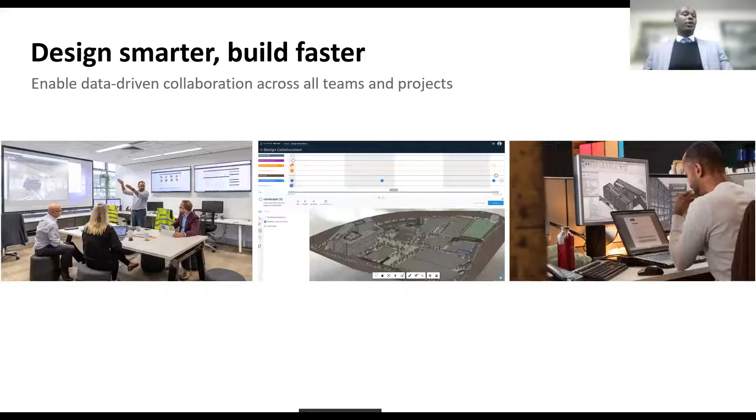That is then possible by using the power of the cloud, because by using the power of the cloud, teams can now work together in a connected way, maximizing all the efficiencies that we have.

We are reducing all these inefficiencies, and we start avoiding rework. At the same time, these tools, by working in the cloud, are flexible because we can work from anywhere. We can do the designs from anywhere. We can collaborate using these tools anywhere and anytime.

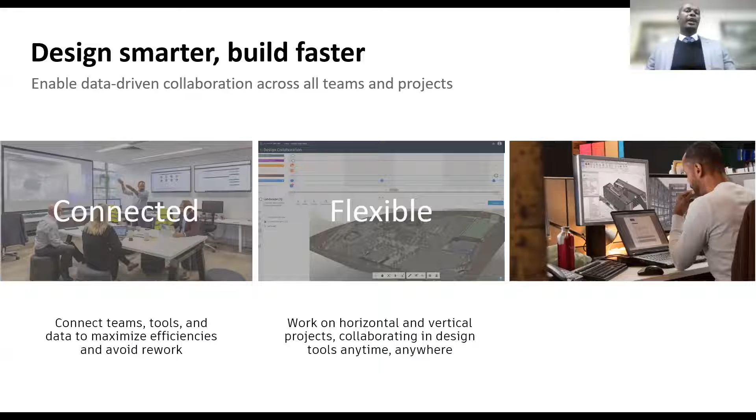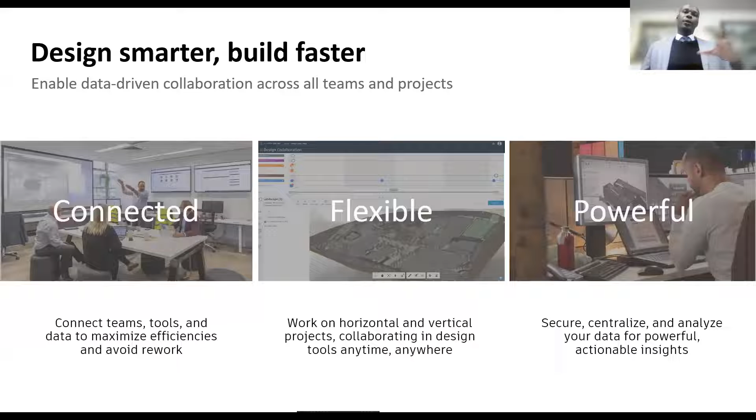Using the power of the cloud is very powerful, because you do not have to rely on your own computing power. All your project data is stored in a secure, centralized place, where you can also get insights from that data. And that is the solution to all the problems we face in the construction industry today, using the power of cloud collaboration. This is where it all comes together to fix the problems we face as an industry today. So what is BIM cloud collaboration?

The concept behind cloud collaboration is creating a platform that connects the whole project team. Think of teams working together in real time, even though they're in different locations, and being able to collaborate together even though you're using different software, working as different disciplines. You could be a mechanical engineer, a structural engineer, an architect.

All of these stakeholders are using different tools. But can you imagine if they could all work together and have visibility of what everyone on the team is doing in real time? This can then make it easy for all the designers on the project to make edits in this one central cloud model that is sitting in the cloud in this common data environment.

But also, the beauty about cloud collaboration is that even if you're not a designer, even if you don't use any design authoring tool, using the power of the cloud as an approver within a cloud platform, it will be great for reviewers. Why? Because you only have one place to review the project documentation.

So let's say you're a manager or a project manager, you have all the information about the project in one place. You can provide inputs to the whole team in real time because everyone is connected on this one platform. And then there's also decision makers on a project.

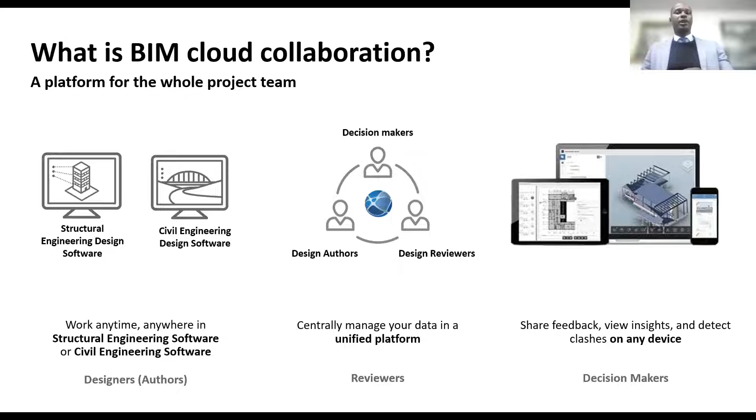So cloud collaboration, in addition to what I've just mentioned, allows teams to understand the latest changes in a model. And all of this is in a combined view because it combines all the models from all the different consultants. All those models come together. You have one place to view the information, no matter what software it's been created in.

And also, the power of cloud collaboration is that it has these project management tools that let everyone track whatever change, information, or work has been done by anyone on the entire team, because you have these beautiful swim lanes in this cloud environment that allow you to see what everyone is doing.

And also, this is one of my favorites: using the power of the cloud, you can automate the clash detection process. So if one person has made something in 3D and it's clashing with another model, you can see that it's clashing. Traditionally, we would look for those clashes manually, but using the power of the cloud, you can see that automatically. You can also start to track issues.

You assign issues to people in real time, and you can also manage change requests and publish documents, sending them between the team without the need for email to send a model to another team member. Now you can publish that model to the cloud, and everyone on the entire team is notified of the model that's been uploaded to the cloud.

Not all decision makers need to have an authoring tool, but they can also enjoy the power of using this cloud technology. Having a cloud platform is great for the entire team because it uses more than one design authoring tool. Most probably you're a design author and a structural engineer, and the amount of work you're doing requires you to coordinate with a civil engineer or an MEP engineer, because whatever they're designing is going to affect your design. You can use the power of the cloud to combine all of those models into one common data environment, overlay all those models, and actually see that work in real time.

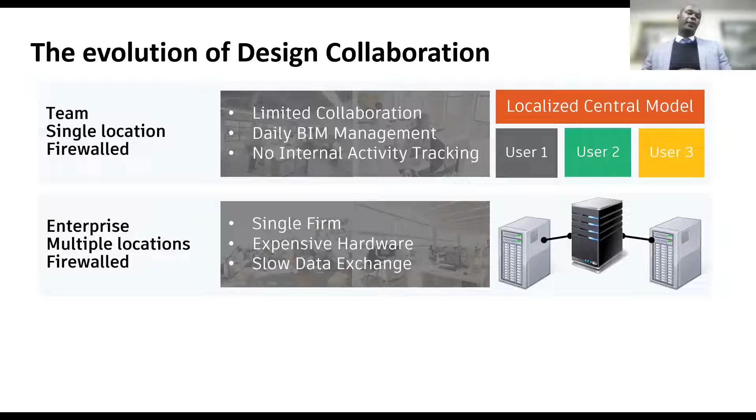Also, setting up that sort of technology was very expensive, as well as the problem that the data exchange using these methods of collaboration was very, very slow. However, with the power of the cloud, if we can collaborate in the cloud, all the project stakeholders can take part in this project, so you're not risking your data. Using the power of the cloud, multiple companies from multiple locations can also have managed access onto this, and also work faster and in real time.

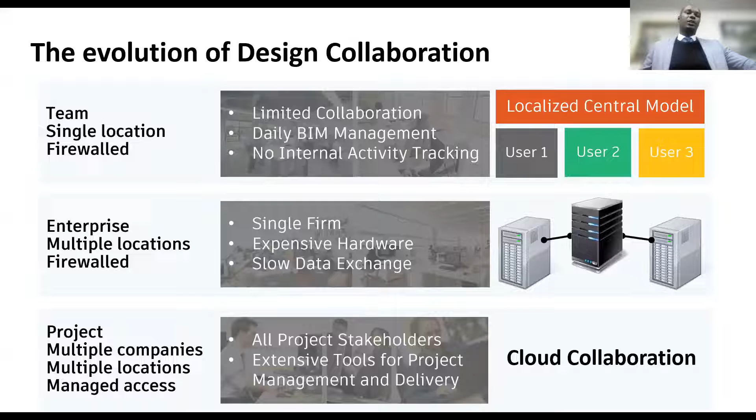It also provides these extensive tools for project management and project delivery. So what are the benefits of working from the cloud as opposed to working off your local server within the company? Working off a local server, you can exchange data and you can also work share, but that's it. If you are working within the cloud, that means you can now invite people from multiple companies to work together. You have a visualization tool, which you do not have if you're working on a local server.

The advantages of working on the cloud is that you can view all of this information on a device, whether it be your iPad or your phone or any tablet, and you can also take part in that design process.

And lastly, all the data is going on to one place. So whether it be a quantity surveyor, an architect, anyone who's working on the project is sending that data to one place. That saves us that problem we mentioned at the beginning, that 96% of all our data is lost. But if we're all saving the data in one place, it would be a great value to our projects.

What are the features that we face when we are collaborating on the cloud? First, a cloud collaboration platform should have a document management environment which accepts multiple files. It should be able to accept 50 plus file formats. Whether you're working in PDF, it's got a PDF viewer, whether you're working in Excel, it has an Excel viewer, or whether you're working in any STL file or any of those multiple files we have in the industry today, this common data environment is able to host these files.

If your concern as a structural engineer is efficient team coordination, you can use the power of the cloud to ensure your project team is always aware of the project's overall progress. With the cloud, you have visual project management tools to track what everyone is doing. You can facilitate model exchanges and understand the changes between designs in the context of aggregated models in one single space.

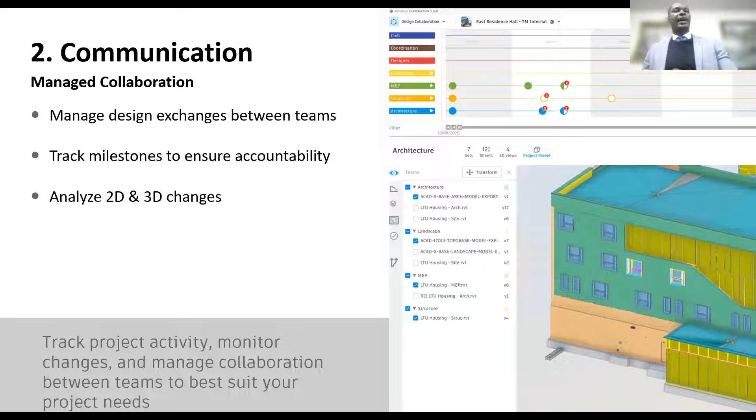With the power of the cloud, you have powerful visualization that lets you view your designs and the phase, differentiate which discipline it is, know which building level, and do cutouts and so much more in the cloud.

Let's talk about communication. If your concern is accountability, ensuring that everyone on the project is completing their tasks in a timely manner, with the cloud you can create issues and markups all within the cloud. These features let you pin issues in context, provide a comment thread visible to everyone, add photos, assign work, set milestones, and communicate issues in a way that's very visible to everyone.

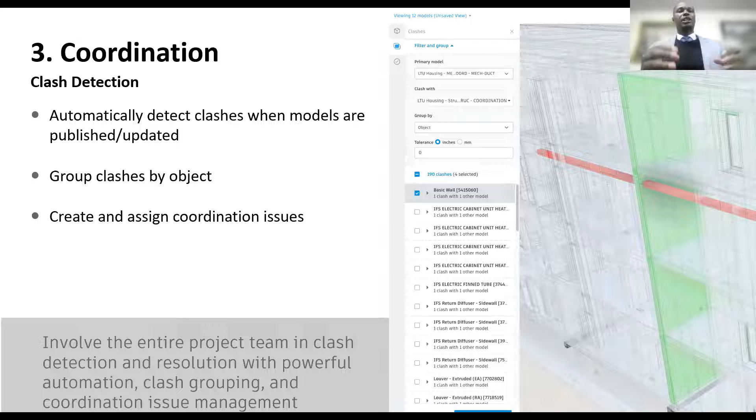With the entire project team involved in clash detection, you're able to resolve all the clash detection issues because, using this visualization tool, you can see whatever is clashing, assign these issues to be resolved, and then have them worked on.

But you might want to see how it works, right? So let's talk a bit about how it works. Instead of emailing a drawing, for example, to an architect, how would a structural engineer collaborate with an architect in the cloud? Please allow me to show you the next demonstration.

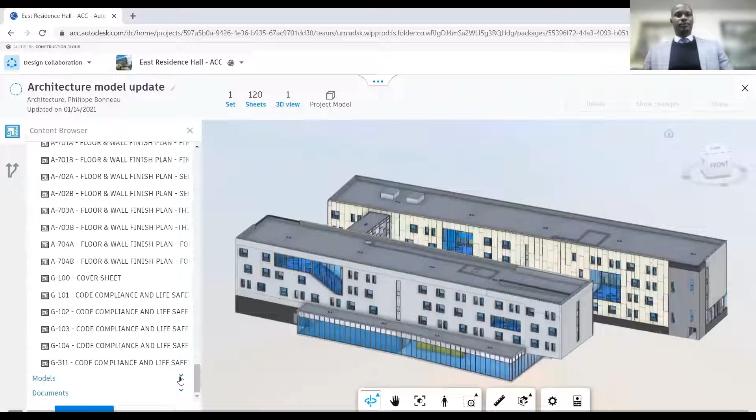Here, the architecture team creates a package and decides which content to include in this package. The package can then be explored and consumed by the other teams. Here, the structural team sees that a new package is available from the architecture team. After exploring the package and reviewing the changes that will impact their model, the structural team decides to consume the package.

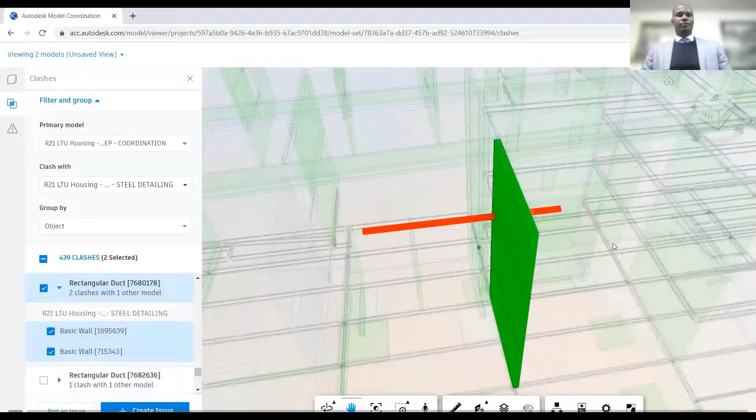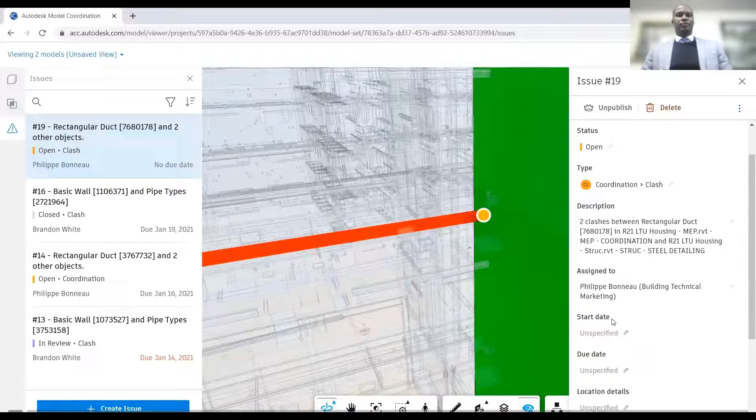Before a construction project breaks ground, it is important to identify and resolve clash and constructability issues. Model Coordination performs automated clash detection of models hosted on the cloud, enabling design and trade partners to quickly identify and resolve model conflicts. In addition, users can easily create, assign, and track coordination issues to ensure accountability and resolution.

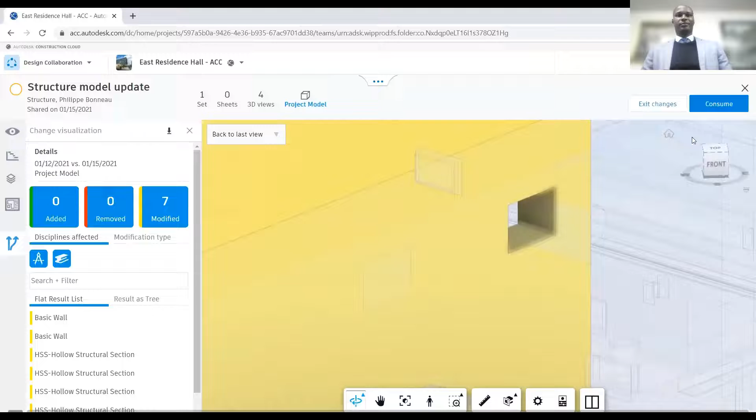Once the problem has been resolved in the Revit model, the team can create a structural package of their own and communicate their design changes back to the larger project team. The other team sees that a new package is now available on the project timeline. They can explore the package and use the Show Changes tool to better understand how the design has been changed.

Once the changes have been reviewed, they can change the status of the issue and close it out. Isn't that so beautiful, that we can start creating all these issues and resolve them within one environment, without having to use disconnected workflows. But how does a structural engineer collaborate with the rest of the team using the cloud?

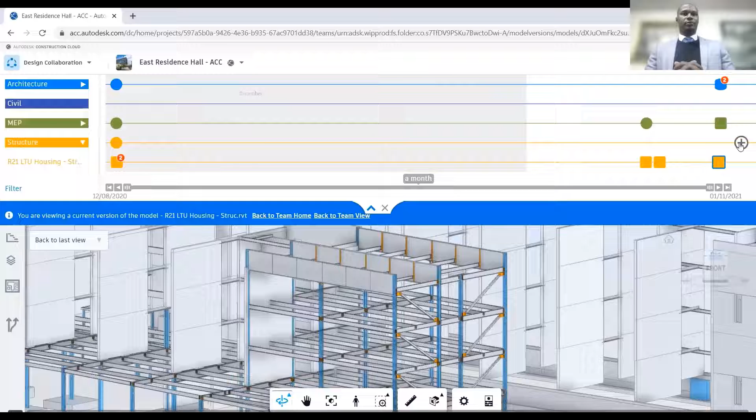Project teams communicate their design updates with each other using the Design Collaboration module in Autodesk BIM Collaborate Pro. Other teams get notified through the project timeline that a new package is now available. To make these changes available to other teams, the structural team creates a package, a combination of one or more sets to be shared. This package might include the Revit model, an IFC file, and other supporting documents.

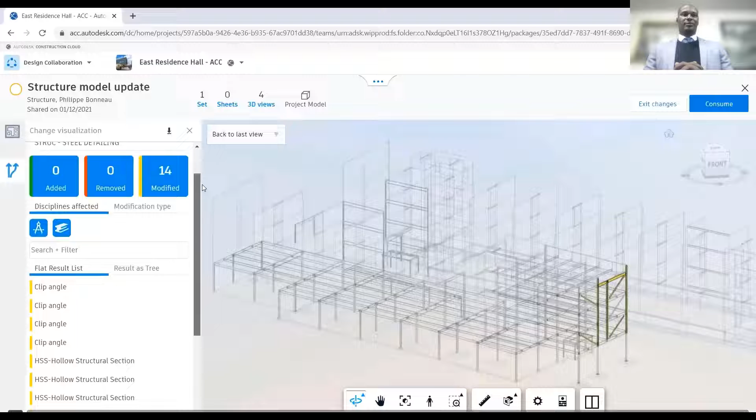Once the structural team has created and shared this package, other teams will be notified via the project timeline in the Design Collaboration module. Here, the MEP team sees that a new package is available from the structural team. After exploring the package and reviewing the changes that will impact their model, the MEP team decides to consume the package. This updates the aggregated project model view in the Design Collaboration module, where you will see all consumed models plus your own work-in-progress model overlaid on top of each other.

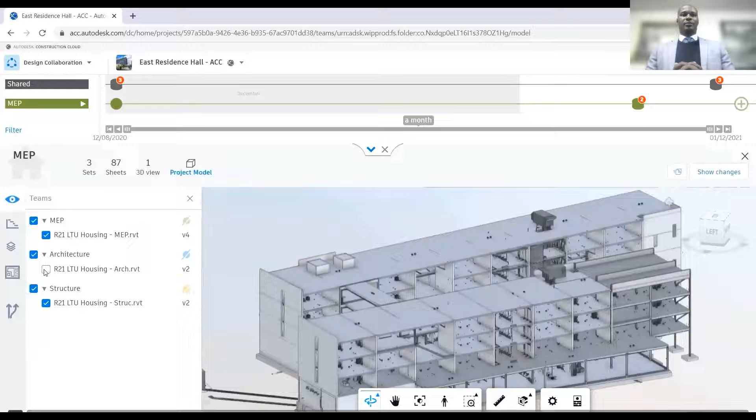The days of having project team members lie that they have not received an email with your model are over when you use this cloud technology. But as structural engineers, on ECSA Stage 3, we are required to coordinate these models. How can we do it using this technology?

In the Model Coordination module of Autodesk BIM Collaborate Pro, multidisciplinary teams can quickly identify and resolve clashes and design errors prior to construction. In Model Coordination, you can view models that have been uploaded to the cloud.

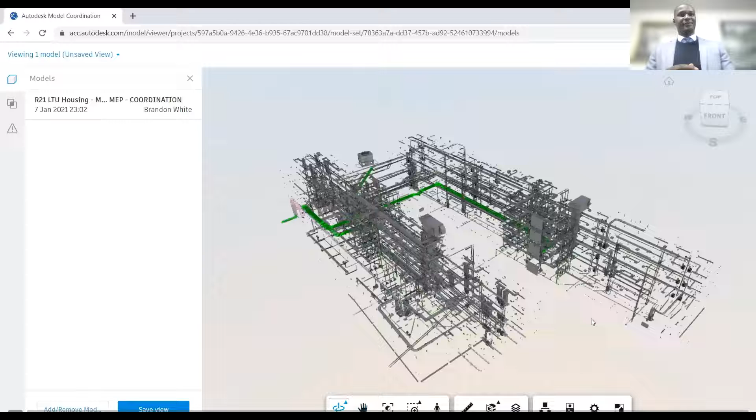From here, you can select models from your coordination space to use in Model Coordination. You can create saved views of a select group of models, which is helpful when working with subsets of a given project.

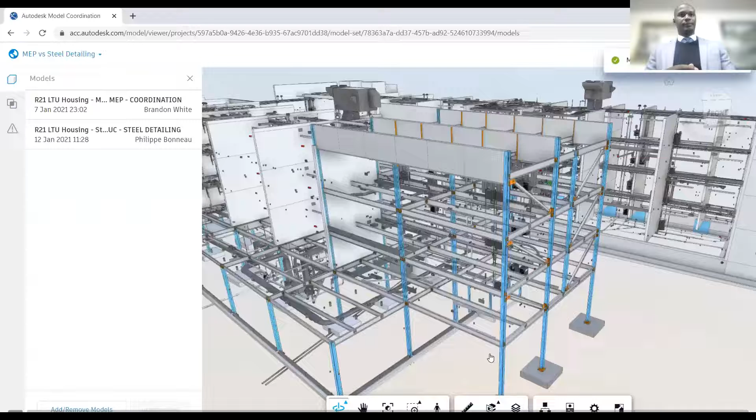Models uploaded to the folder are coordinated and instantly clash-checked. You can view the number of active clashes between any two models in this matrix. Clicking on a cell will navigate to the clash location, showing you what is interfering between structural and MEP. This means you can easily review clashes without waiting for coordination meetings and precisely locate those clashes within your models.

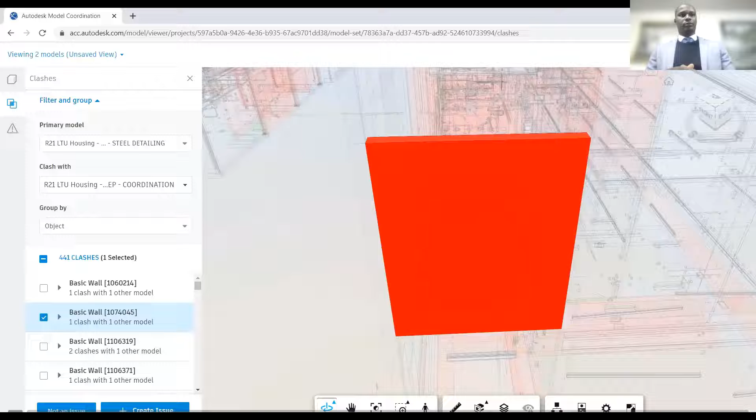You can mark a clash as not an issue if it does not require further attention. Model coordination allows you to create and edit issues directly from clashes between models. The issue title contains the ID number to help track the element in the Revit model.

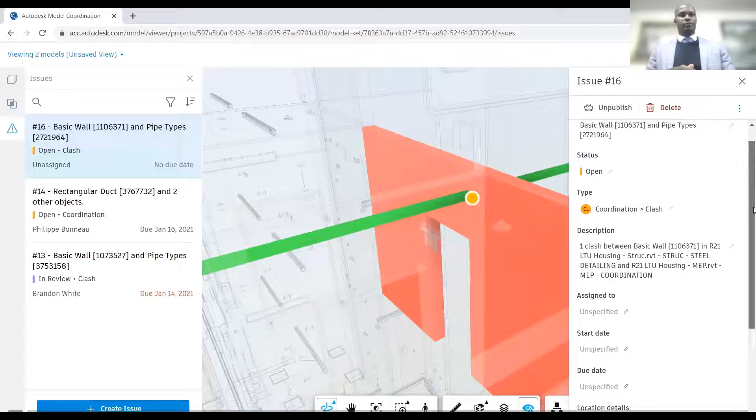You can edit issue details, add information such as location and due date, and then close the details panel. The issue owner will receive an email notification with a link to the issue.

If you go to Build Issues, you can see the list of issues which have been created for this project. You can view issue details here. A screenshot of the clash also appears here, automatically captured at the moment the issue was created. You can easily change the issue status from open to in review, or even to closed once the problem has been resolved.

Let us now finish off by talking about where this technology is being used. You'd be happy to know that this technology of working on a construction project and collaborating using the cloud is being used in 150 countries.

This technology is being used on 70,000 active projects right now, and there are over 150,000 models in the cloud, and there is over 10 million syncs. So this is how much people are working in the cloud.

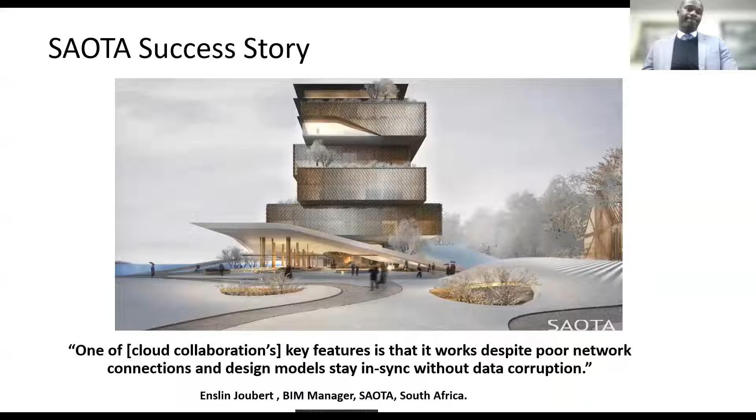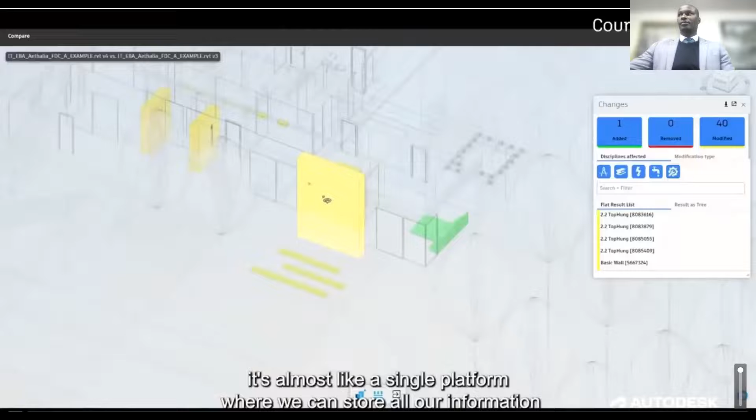Well, now that we've started working from home, we've adopted the BIM 360 method, which has essentially eliminated all the issues that we had when trying to connect to the server over long distances and trying to communicate across the team. The BIM 360 platform has also allowed us to, it's almost like a single platform where we can store all our information, and we don't necessarily have to worry or consider the back and forth between the connections and the different server files and folders.

One of the key tools of Revit we use is design options, where we switch between different options and see what will work given the specific scenario. And because of the fact that we are a design-driven practice, the modeling process is an important way to assess that.

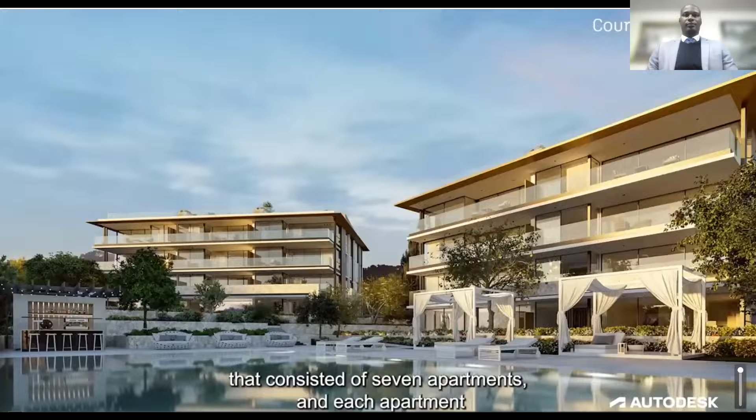We had an estate, a multi-residential estate in Mallorca that consisted of 7 apartments, and each apartment had 6 units and 2 penthouses, and 2 of those units were duplicated. With Revit, it allowed us to use the tools linking and grouping, so we could make one change duplicated across the units that were used more than once. Where a project like this, say on AutoCAD, would take months, we ended up taking weeks.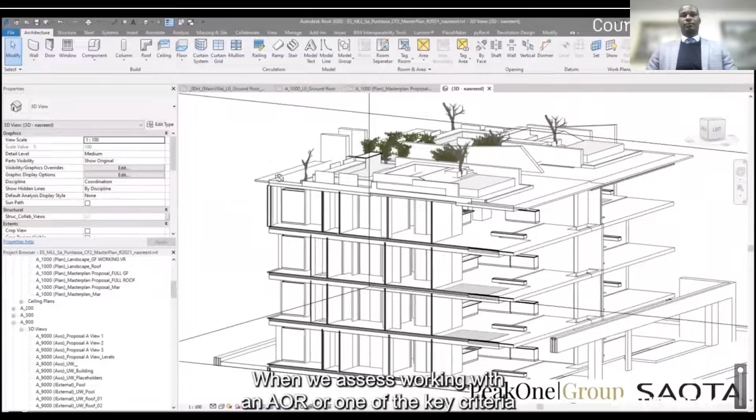When we assess working with an AOR, one of the key criteria is whether they work on Revit or the BIM 360 platform. In doing so, we're able to live work with one another on cloud-based models. There's less room for misinterpretation, and our design concept is maintained throughout the project, and throughout the project timeline.

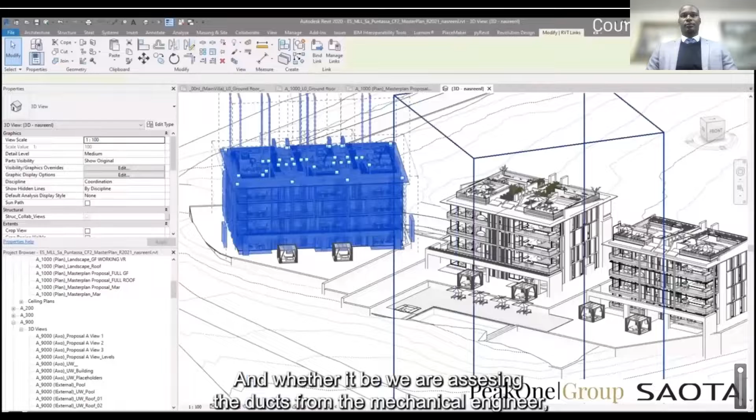Whether we are assessing the ducts from the mechanical engineer, conduits from the electrical engineer, and whether they work with the ceiling depths we propose, we are able to eliminate any room for misinterpretation, without having to drag different drawings from across different folders, across different servers, and at the risk of using superseded drawings.

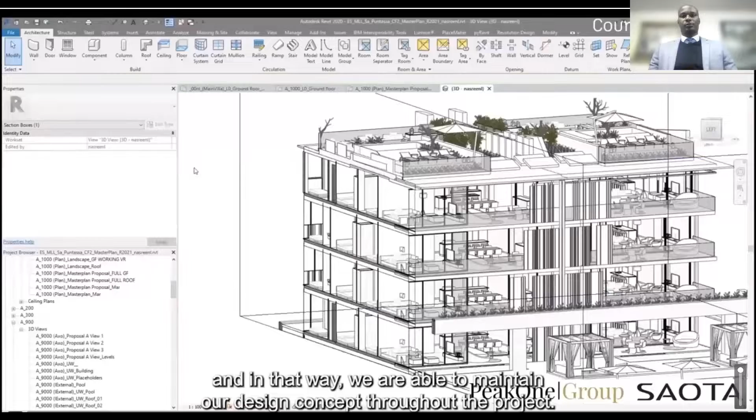So we are always doing clash detections and looking for areas, and when we do make a change, our consultants are able to assess them in real time as well. In that way, we are able to maintain our design concept throughout the project.

It is imperative to us that our documents are as engaging as possible to our clients, and with the 3D illustrations that we deduce from Revit, we are able to... Well, now. All right, and lastly, this is another example.

This is an international example of the Red Sea development. If you know anything about the Red Sea development, you'd know that it's the 3rd largest giga project, and it's currently being delivered as part of Saudi Arabia's Vision 2030. To deliver this vision, the client invested in best-in-class technology and used the power of cloud technology to be able to make decisions. They've actually said that the cloud technology offered them speed, and a saving of 1,200 man-hours, because a lot of the processes that used to be done manually have been automated. So that is what we get using the power of cloud technology.

At this moment, I would like to finish off this talk by doing a live demo, just to show you what can be achieved, and take you through different scenarios of how a structural engineer would like to collaborate with other stakeholders on a project. You'd notice that there are several cloud platforms available on the market, from multiple vendors, and these developers are making this cloud technology happen to everyone, because the future is in the cloud. I happen to be very well acquainted with the Autodesk Cloud Platform, so I'm going to stop sharing my screen and open up a cloud platform, and show how the collaboration could work in such an environment.

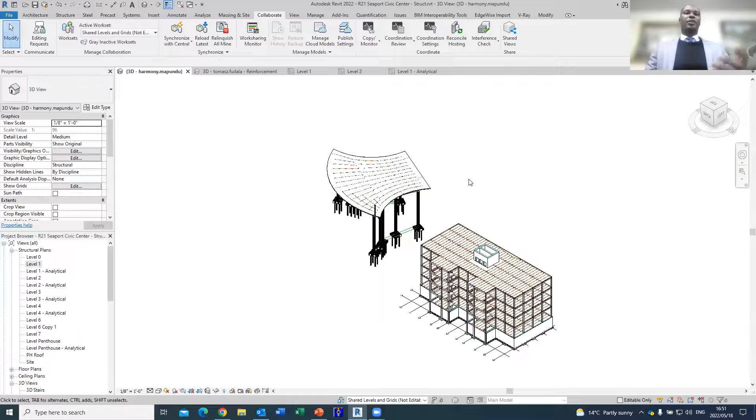For example, using Revit Structure, a structural engineer would have completed their designs, and there's an option to share this design in the cloud. They would go to the collaborate tool and click share in the cloud, and their model is then hosted in this cloud environment.

A structural engineer would go on, let's pick this level, on the collaborate tool and synchronize with Central. By doing that, you automatically send your model to the cloud. In this case, this model has already been shared with the cloud.

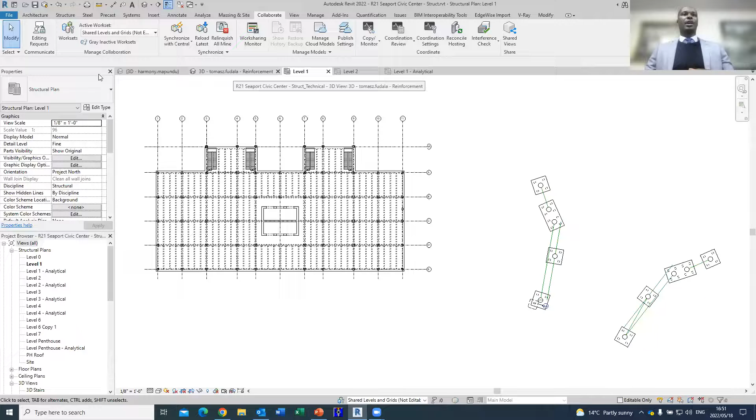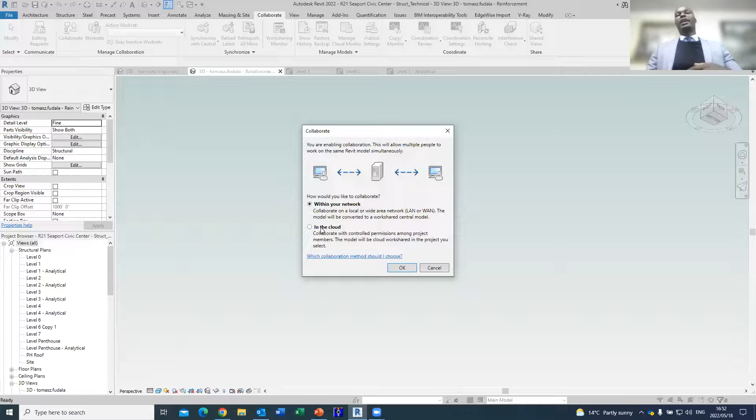But if you're working on a model that has not been shared to the cloud, the structural engineer would click on collaborate, and the model automatically is shared into the cloud. Whichever software you use, there's a cloud sharing functionality where you can share the model into the cloud, and it's processed and saved as a cloud model.

I'm not going to spend much time on this, but you already see the advantages — it lists all the projects that you have, and you can easily synchronize your model into the cloud.

The beauty of some of this is that there are now add-ins where issues raised in the cloud automatically come to your design software. There's also an issues tab, so if someone raises an issue from their phone and assigns it to me, that issue comes straight into my design software and I'm able to respond to it.

So as a structural engineer, once we've finished our designs or are in design in progress, we send our model to the cloud, and that model comes into the common data environment that I've mentioned.

You will pick a folder where you have permissions to share that model. Depending on the permissions set on the project, your model goes and sits in this particular place. It also tells you the day the model was sent into that space, and shows you a version of that model.

You can then view that model in this 3D space, and decide to share it with the rest of the team if they want to approve it. Once the model has been shared on this common data environment, you can view that model in this design collaboration view.

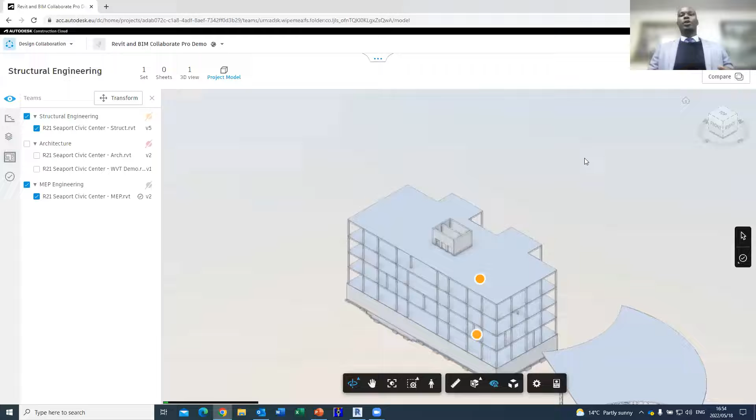For example, you'd like to work on that model in the 3D environment. As a structural engineer, you click on project model and you're able to view your project model, and see how it's interacting with the rest of the other disciplines.

In this case, our project model as structural engineers is interacting with the MEP model, and you're able to switch off the MEP model to see how your model interacts with the rest of the other models.

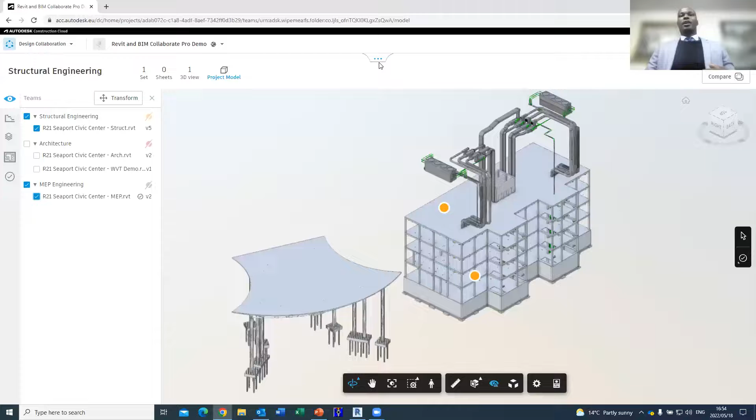We talked about having these project management tools formed by swim lanes. I'm sure a lot of people might have asked, what is a swim lane? With the cloud collaboration platform, it provides all the project team members with visibility on what has been done by the other project team members.

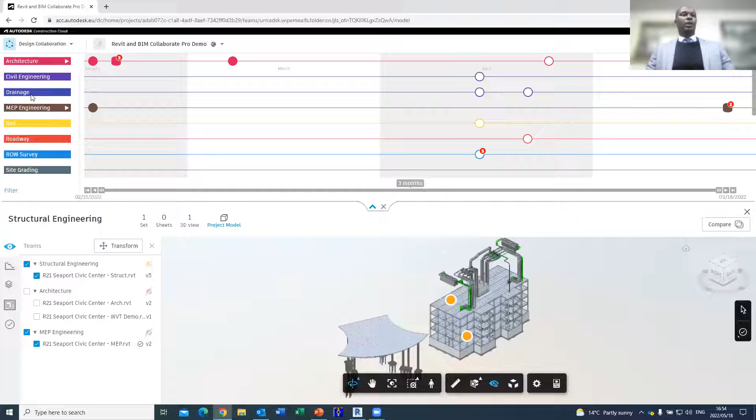You can see that the architect consumed a model on this day, and that they shared this model on that day. You can see everything they are doing in this environment. So let's say, for example, the MEP team shared a model on this day.

You're able to click on their model as a structural engineer, and you're able to click on the model that the MEP team shared, then view that model and compare the changes that have happened from the last time the MEP shared a model, which was 15 Feb 2022, and this new shared model, because the power of cloud technology automatically calculates using cloud computing the number of changes happening between the old model.

In the old days, when you get a drawing from another project team member, you'd rely on these revision clouds. You'd ask for a project team member to show you what they've changed and how that's going to affect your design. But with the power of cloud computing, you're able to view these models in that environment.

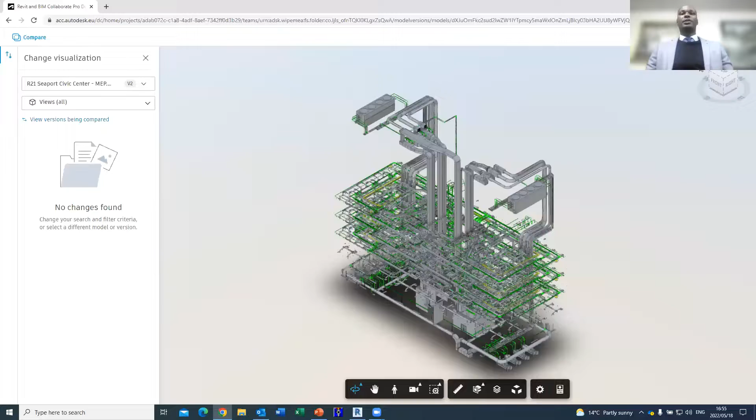As well as, let's say for example, I'm going to click back to home. Let's say you have received a model from an architect. You're able to click on that model, bring it into the space, explore that model, and create and assign issues about that model as well.

One of the things I like about cloud technology is creating a watch group. I'm sure every structural engineer is aware of the number of times people can revise a design during a project, because when a person makes a design, two weeks later they've revised it again, and now I have to revise the spacing of my columns.

We can create what's called a watch group. When we create a watch group, we're saying we want to monitor certain elements of this design from this particular team member. Let's say this architect is constantly getting inspired, so what you can do is click on architecture, load the architectural model, and then say this model is from the architect.

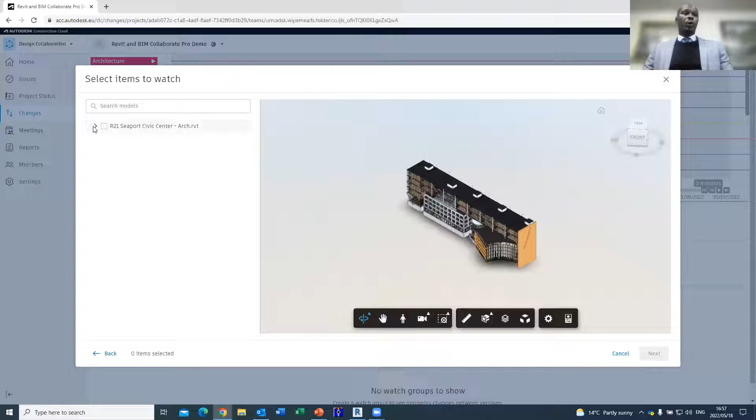Then you click on next, and say please, can I watch these elements? So from all the elements this architect is going to make, I want to be notified on any changes to the columns, any changes to the floor. You click on next, create a watch group, call it 'architect changes', and save that.

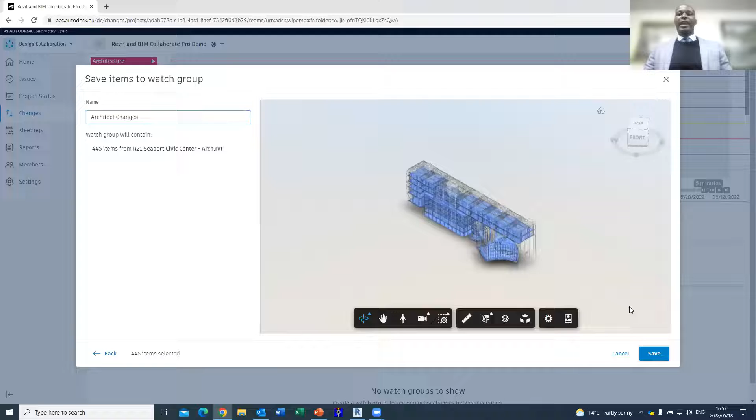Anytime that architect makes any change to his model on those particular elements, that watch group sends an email to you, and also notifies you in real time when that change has been made.

Also, with cloud technology, we can start creating meetings from within this space, and reports within this one coordinated environment. This also links up to our meeting tools. For example, if we have our meetings in Microsoft Teams, we can add the links, meeting attachments, and meeting notes.

All of this is jotted down in this one environment, reducing the need to go into Microsoft Word to type out the minutes, and also the distribution of minutes and following up of action points. All of that can be done in this one environment.

Also, in terms of reports, the project manager has visibility of everything happening on the project at that time, because you're able to create these project reports. So that's just the basics of some of the things a structural engineer can achieve using the design collaboration module of cloud technology.

Now let us talk about another powerful feature, which is coordination. Within coordination, a structural engineer can look at their structural engineering design and start to understand how it is clashing with the designs of another team member.

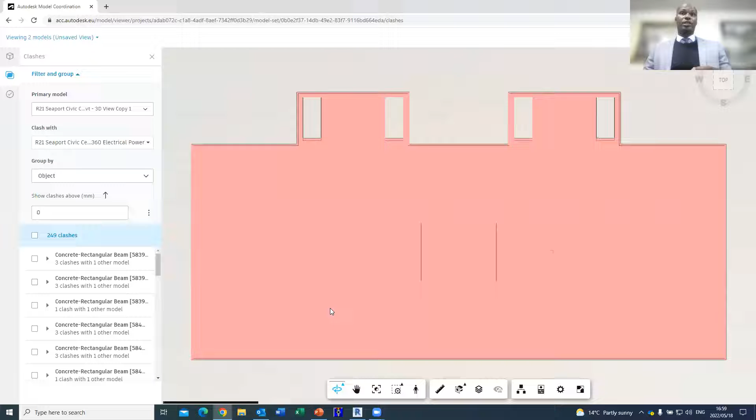When you click on those clashes, it loads each and every location where that clash is located, reducing work for structural engineers who would otherwise have to look for each instance where their model clashes with another team member's model. We can already see in this case that this concrete beam is clashing with that element.

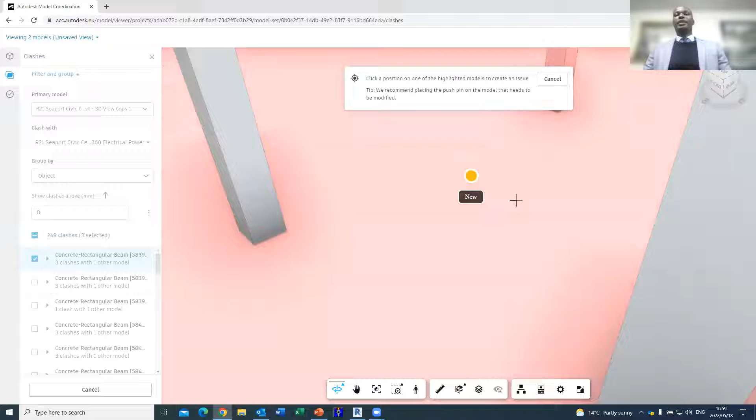If we need to create some openings, we can click on that clash at that moment in time and create an issue. When we create this issue, we can point at the place where the issue is, and then assign that issue to a person who's responsible for resolving it. For example, you might think as a structural engineer that the electrical engineer needs to move their lighting fixture away from your beam. You can create that issue and assign it to the particular person.

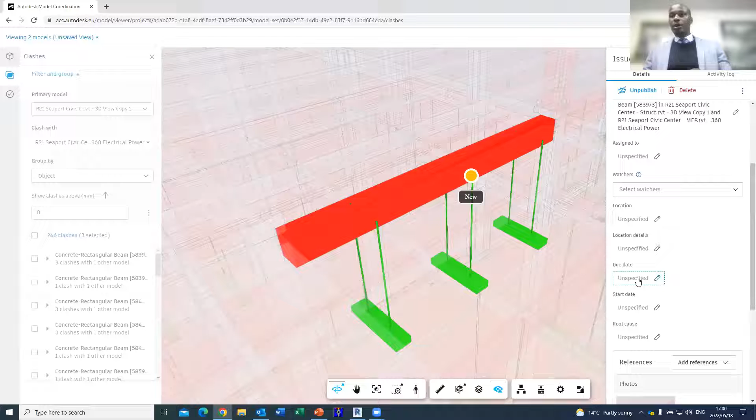On top of that, you can select people who you'd like to watch whatever's happening on that design, so you can give them visibility on what's happening. You can set the due date for when this needs to be resolved, and you can also specify the root cause. Automatically, this information is sent to that person's email with a screenshot, so they know when they need to respond. That's the power of cloud collaboration using the clash detection tool.

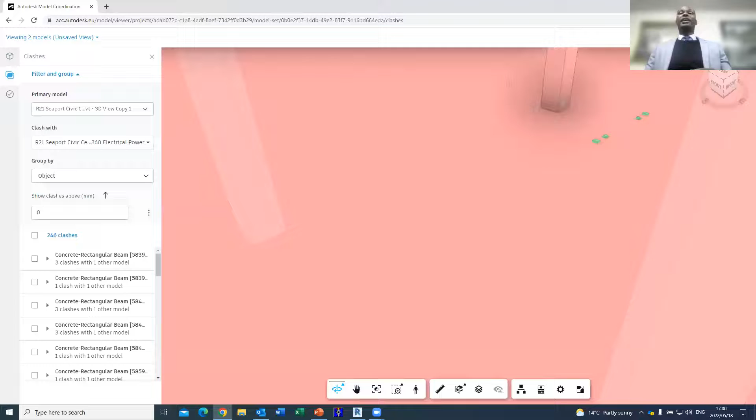This clash detection can happen between any discipline. If you, as a structural engineer, want to understand how your design is interacting with another person's design, as long as they're working in 3D and have published their model, you can see them.

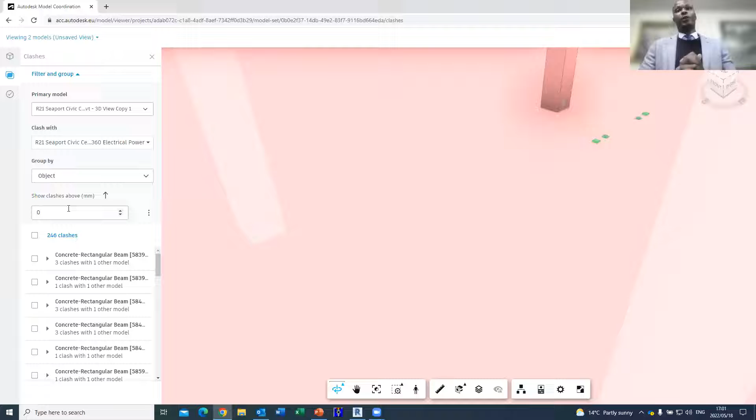We've seen that there are so many clashes, and many of them could be negligible. For example, you can set up a rule that a clash within 10 millimeters of tolerance is not a clash — it's a normal joint. With the power of this cloud technology, you can set your clash tolerances, and the software automatically knows this is not a clash and ignores it.

One thing I really like about this is that it's constantly looking for clashes. So if someone uploads a model now, it automatically checks for a clash and tells you when the last clash check happened. You can set it to constantly look for clashes.

From a project management perspective, I can automatically see which teams are having problems — for example, there are 4,008 clashes between the architecture team and the structural team. Then I know our efforts on this project need to focus on these two disciplines, because there are a lot of elements that aren't working well and need to be resolved before we go on site.

You can also set up views so that when you want to view this, you can view it in a particular way to monitor the project. You're able to do that with this cloud platform, as well as setting up meetings and reports.

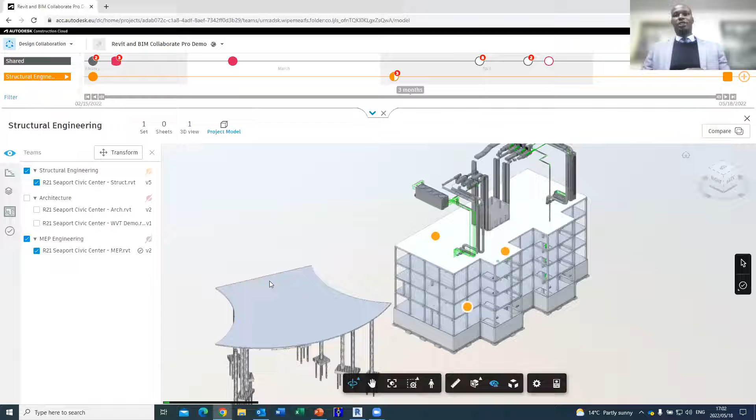But how does a structural engineer who's completed their structural design send it to the rest of the team members? It's easy. As a structural engineer, they can check their project model, confirm the issues and what's been done so far, and once happy with the project, go into the project management timeline and say, 'I am now ready to share this model with the rest of the team.'

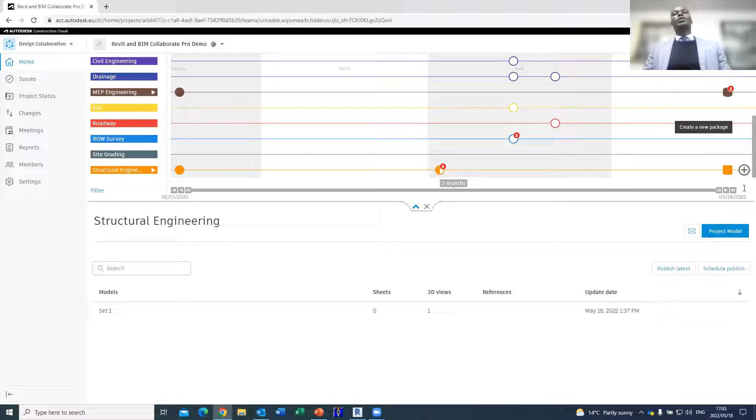Instead of emailing this model to the rest of the team, you create what's called a new package. It shows the structural engineering model you've been working on, and you can specify what information you'd like to send — for example, a 3D copy along with certain documents — and then save. This becomes the package you're now sending to the rest of the team.

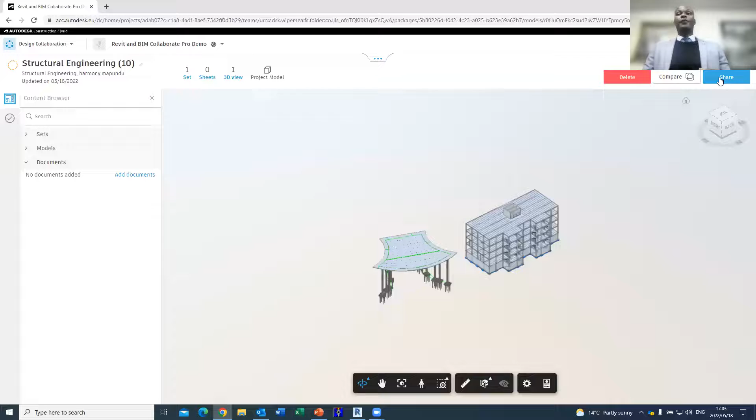Once I save that package, I can share it. It asks for the name and description of the package — I could name it 'Weekly Issue 009' — and then share it with the rest of the team.

Automatically, when I share this, the rest of the team is notified in their cloud environment that this person has shared a model, and the structural engineers have shared a model that is ready for consumption by their team. So for example, I'm the MEP engineer now, and I've gotten a notification that the structural engineer has shared a model.

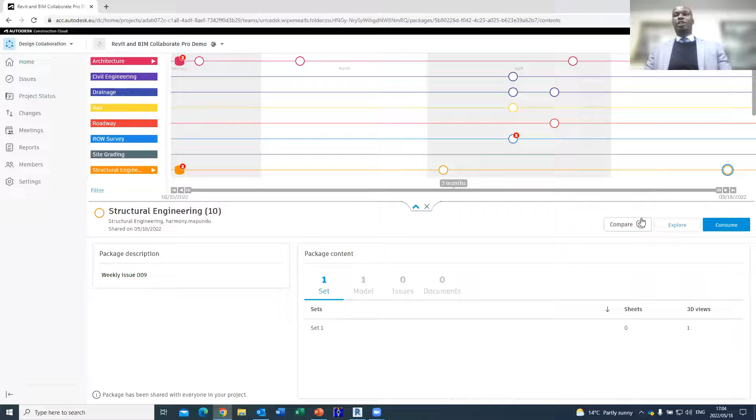As the MEP engineering team, I can click on the model being shared by the structural engineers, then click the compare button, because I'd like to see what has changed since the last time they shared something with us. I can see a visual 3D representation of all the changes that happened from the last time the structural engineers issued it until this time.

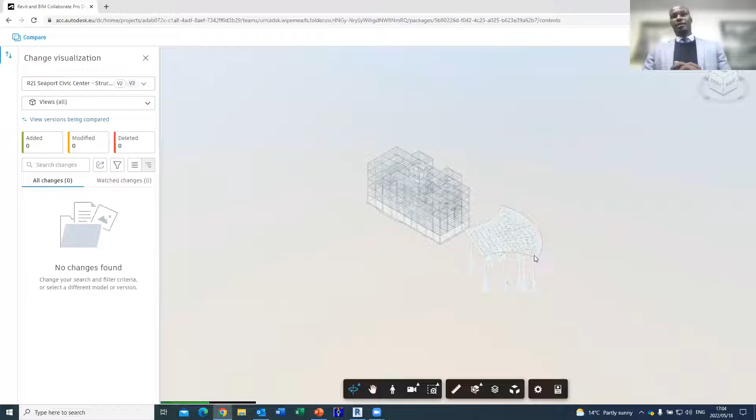So in this case, the structural engineer did not change anything. It shows that they added nothing, modified nothing, and deleted nothing. Therefore, the MEP engineers could say, now we are happy to consume the model, and they are able to consume it as well.

The same could happen to the MEP engineer. When the structural engineer gets a notification that something has been updated, they are also able to consume that model and bring it into their space.

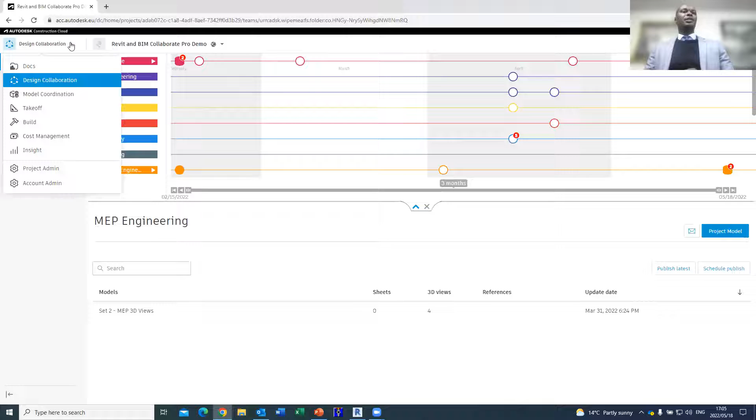Lastly, I'd like to talk about this common data environment called Docs, because even if we're working in 2D AutoCAD drawings, we can still leverage the power of the cloud. Let's say you're a structural engineer and you'd like to compare two versions of PDF drawings. You're able to show that drawing and do version control, because the power of cloud technology is that it can know what has happened in that PDF.

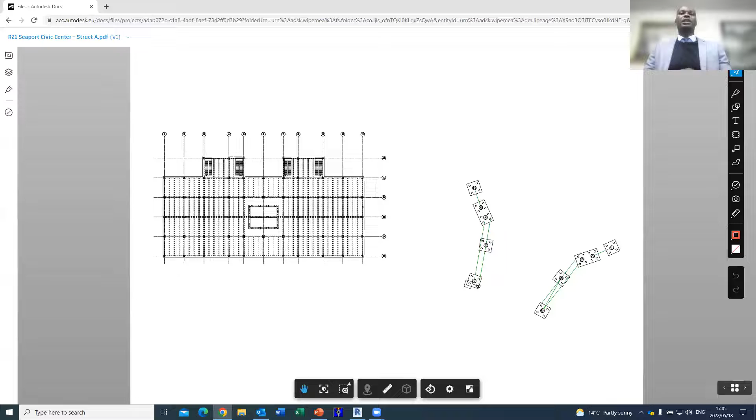For example, I can put two PDFs in comparison, the first as Struct A and the second as the new version. This person who issued us this PDF did not tell us the changes between the two designs, but you can actually use this tool to compare them.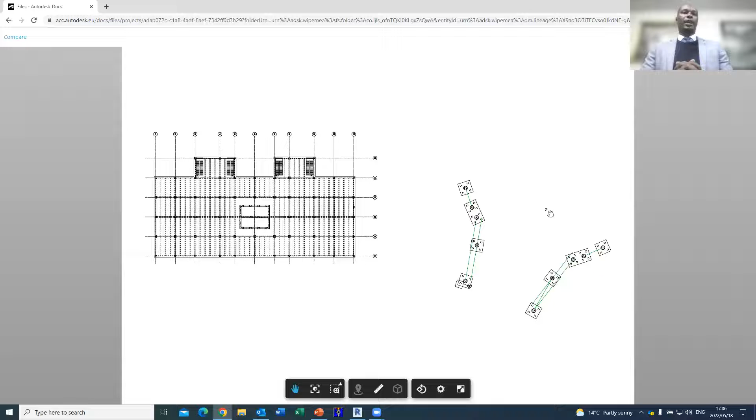And automatically it tells you that the grid line has been moved. So you didn't have to physically look for the movement of the grid line, but you're able to see that it has moved and do something about it.

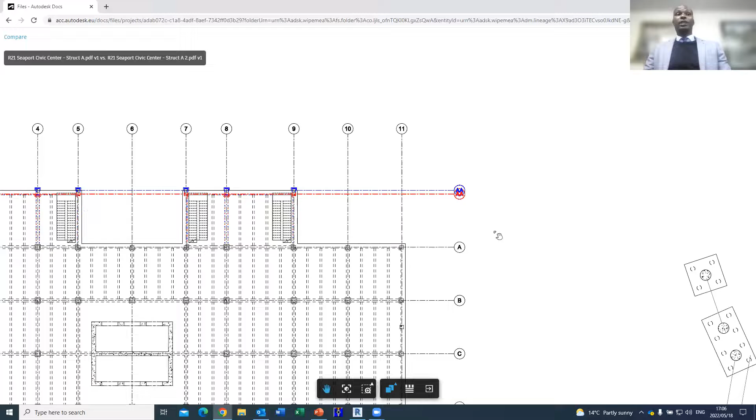You're able to create an issue, raise it with the person who moved that grid line, and all of that can be done. So not only in 3D, but you can also do so much work in the 2D environment.

How have we as structural engineers been approving drawings within our companies? With the power of the cloud, we're able to send drawings not by emailing, but by creating what's called a transmittal. With the transmittal, you can designate a person who's supposed to accept and review your drawing, send it to them, and they're able to review it.

You're able to add a message, and once they review that drawing, it's automatically sent to the rest of the team. The beauty is that the transmittal slips we used to create in Microsoft Word are no longer needed, because the cloud notices what we've issued to the team and automatically creates a transmittal and proof of what has been sent, how many items, and how many times.

So you're able to deal with those issues in this environment. You're able to review the project documents and assign issues, all using the power of the cloud. This is just a snippet of how our work as structural engineers and construction professionals, and the need to coordinate with everyone on the construction project, can be better when we leverage the power of the cloud.